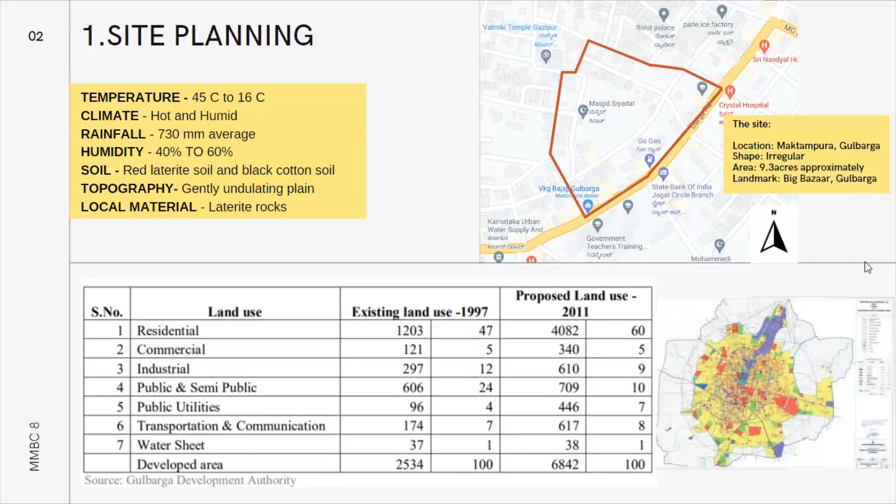The site is situated in Maktampura, Gulbarga, which is 9.3 acres, and the main landmark is Big Bazaar, Gulbarga.

The volumetric hex consists of a large enclosed shopping area from which traffic is excluded, a set of rooms or buildings used as a place for commercial, professional and bureaucratic work, and fully furnished apartments available for short-term or long-term stay.

The vehicular traffic is limited to the periphery in order to have safe pedestrian movement within the campus, and semi-public and public buildings are situated near the road, while the private zone is at the backside of the site.

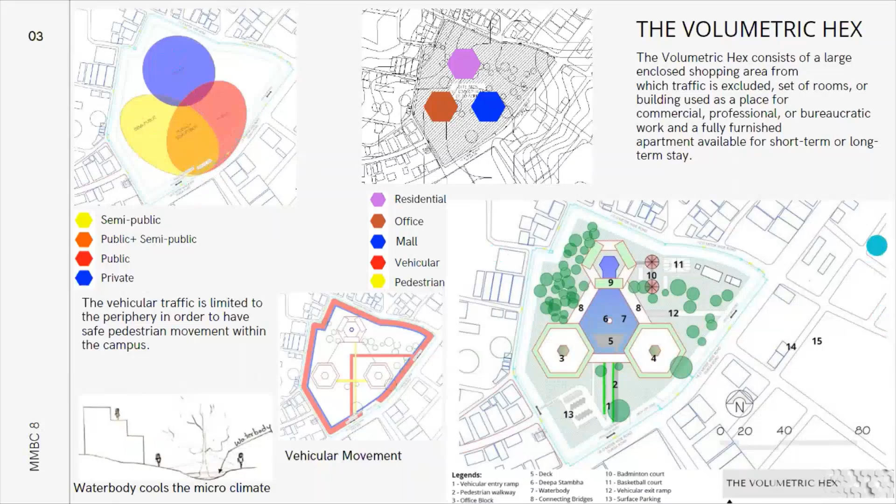Volumes are grouped according to the relationship between each program. The setbacks push the volumes inwards or outwards to create space for windows and courtyards, increasing the visual access from outside to inside.

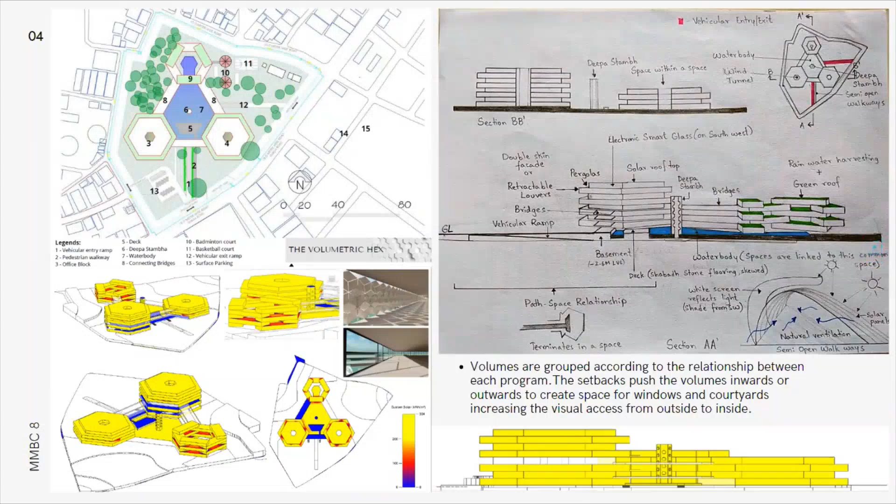Site preservation: dangers like development, people involved are visitors, and techniques like reconstruction, recreation or renovation.

The study revealed that Gulbarga is comprising lack of adequate sanitary and drainage facilities. Therefore, attention of concerned authorities must be made to take appropriate steps in providing for the people of this area.

An artificial recharge of groundwater may be adopted to reduce higher concentration of chemical parameters where it is necessary.

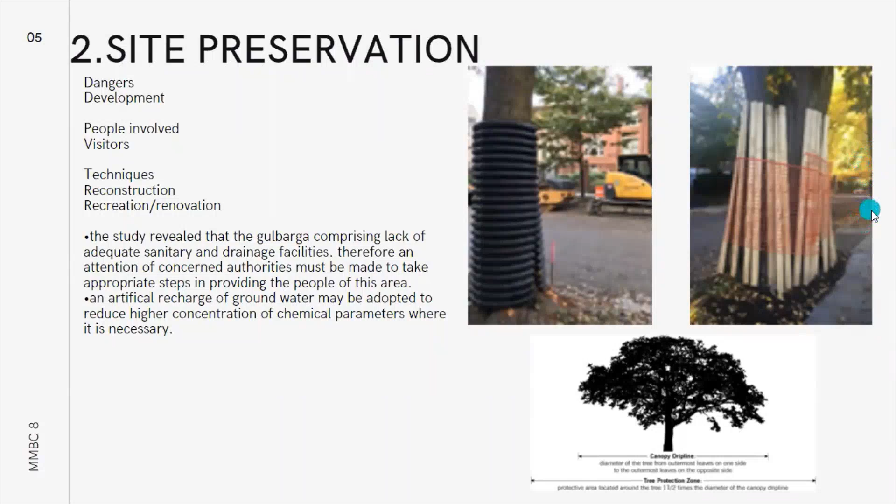Trees in the vicinity of a construction site can sustain damage from soil compaction, severing of roots, trunk and limb injury, and limb breakage from construction equipment and activities.

Preemptive protective measures include collecting and propagating cuttings of historically significant trees before construction begins.

Sensitive construction techniques: plan to use sensitive construction and site work techniques in the vicinity of protected trees, according to avoiding soil compaction during the construction process.

Protecting tree roots from physical damage during the entire construction project, and protecting tree trunks and limbs from physical damage from construction equipment.

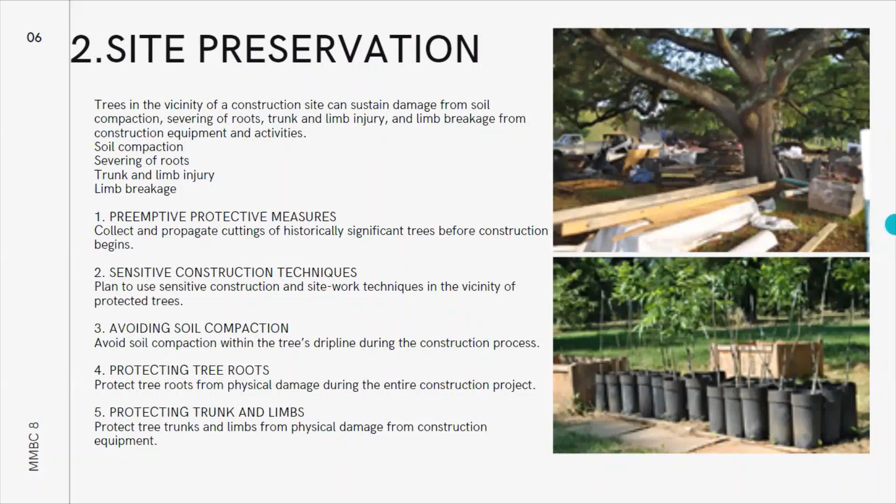Landscape features and vegetation: the type of vegetation is mainly grass, thorny xerophytic shrubs, and trees like acacia, etc. Indigenous varieties are the resultant of all natural forces, adaptation, and survival.

Vegetation such as jowar, groundnut, paddy, and pulses. Also Kamalapur red banana, a special variety of red banana which is exclusively grown in Gulbarga.

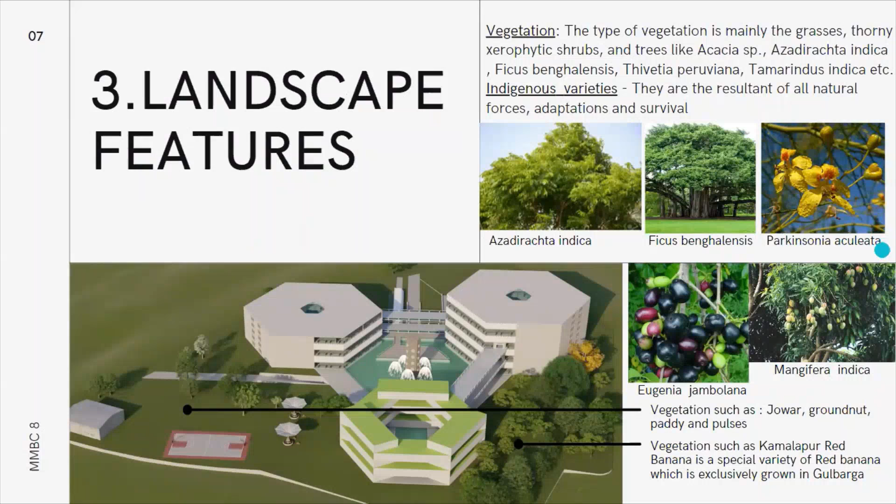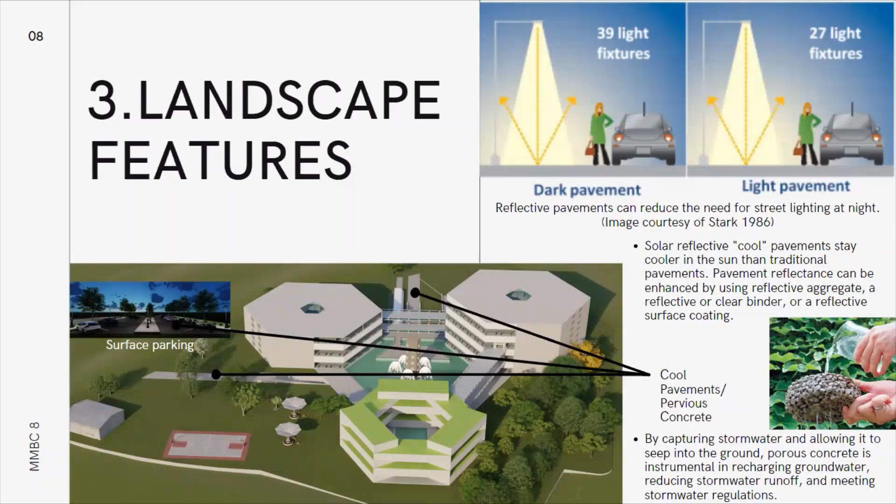Solar reflective cool pavements stay cooler in the sun than traditional pavements. Pavement reflectance can be enhanced by using a reflective aggregate, a reflective or clear binder, or a reflective surface coating. Reflective pavements can reduce the need for street lighting at night.

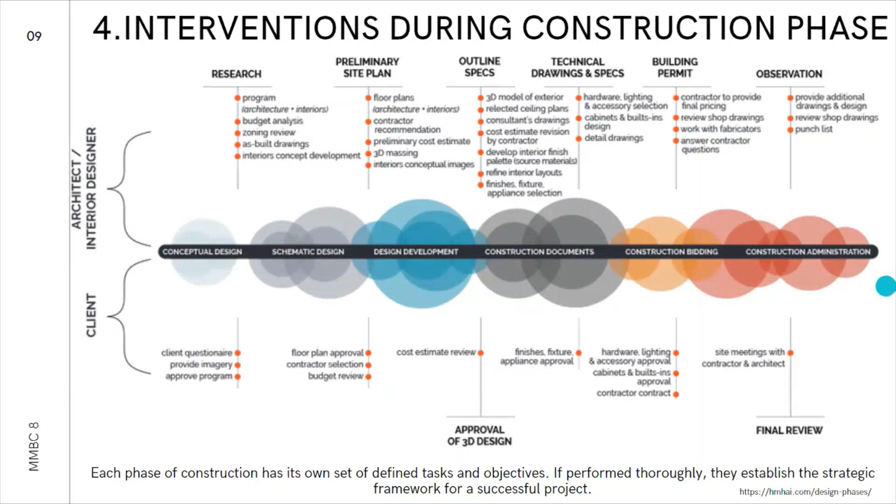Planning and building design, including energy systems like natural lighting, using solar panels, which are designed to absorb the sun's rays as a source of energy for generating electricity or heating.

Solar cells and light pipes are physical structures made for transmitting or distributing natural or artificial light for the purpose of illumination. Smart glass can provide information about a target in sight, and is an automatically operated system.

Double glazing unit is a window with insulating glass with 2 or 3 glass panes separated by a space which is filled with air. Light shelves are a passive architectural device used to reflect natural daylight into the building.

For ventilation, semi-open spaces are given with floor diffusers, which are a grill equipped with a damper that supplies conditioned air.

A wind tower or wind catcher is a traditional architectural element used to create natural ventilation and passive cooling. Personalized air conditioning avoids unwanted or extra wastage of air conditioning and electricity.

Rooftop planting, water treatment of wastewater and reusing of water, and rainwater utilization.

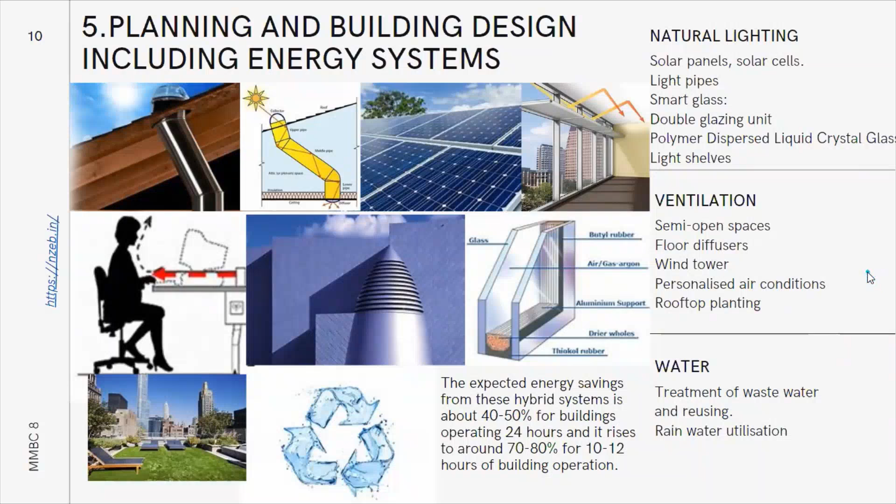The expected energy savings from these hybrid systems is about 40 to 50% for buildings operating 24 hours, and it rises to around 70 to 80% for 10 to 12 hours of building operation.

Provisions for renewable energy systems: for roofs, green roofs and solar panels; for ventilation, heat recovery ventilation and Energy Star appliances; for windows, low-E glass and double glazed; for insulation, insulating walls and ducts, tiles and others like concrete tiles and fiber cement.

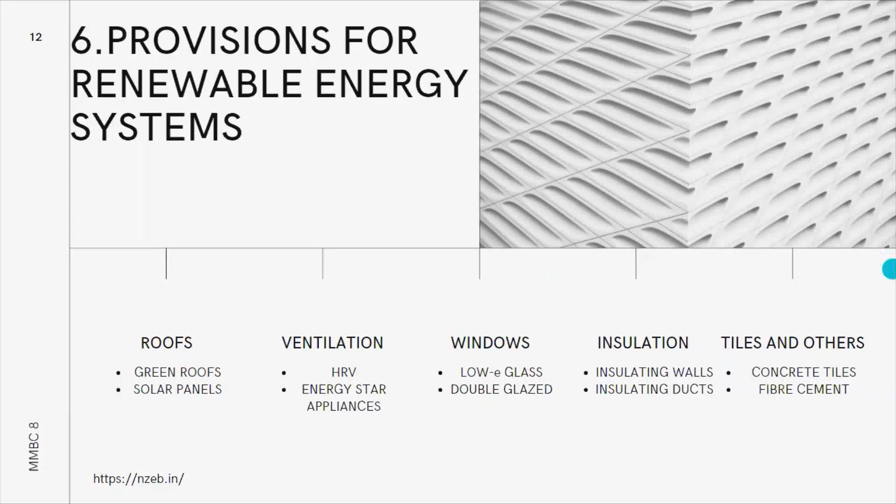These are the locations of each element. For the interior: low-E glasses, Energy Star appliances, solar cells for the pathway covering, green roof and solar panels, concrete tiles and fiber cement for the flooring, and insulated walls.

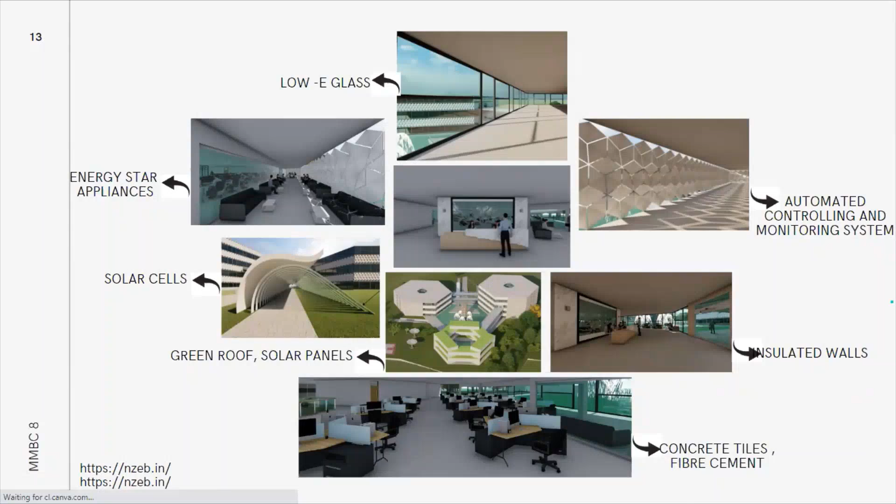Material selection, structure, and interior. Facades are the screen wall of cities.

The first goal here is to improve thermal mass while reducing weight and depth, with lightweighted, prefabricated, opaque facades that are easy to install and reuse, and that behave thermally like heavy massive walls.

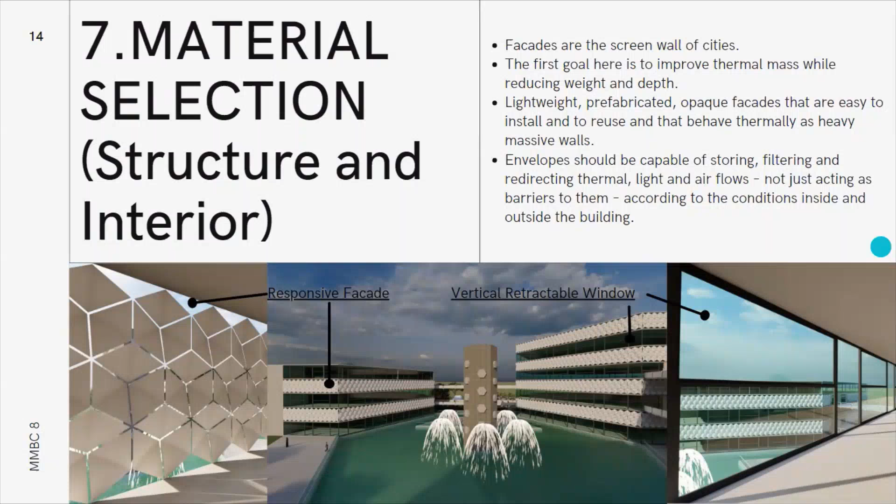The fixation of the substructure movement joints responds independently from the substructure. The triangular unit acts as individual shading devices that unfold to various angles in response to the sun's movement, in order to obstruct direct solar radiation.

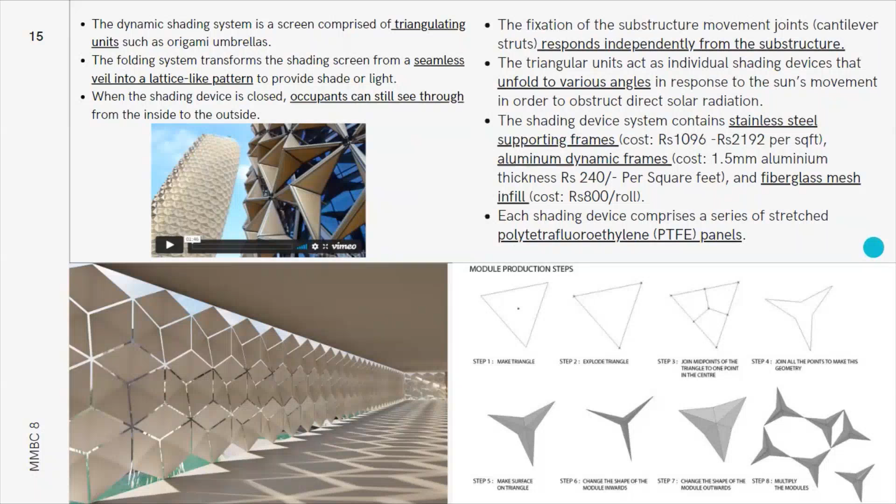The shading device system contains stainless steel supporting frames, aluminum dynamic frames, and fiberglass mesh infill. The stainless steel frames and aluminum dynamic frames, which go up to 1.5 mm aluminum thickness, cost rupees 240 per square foot.

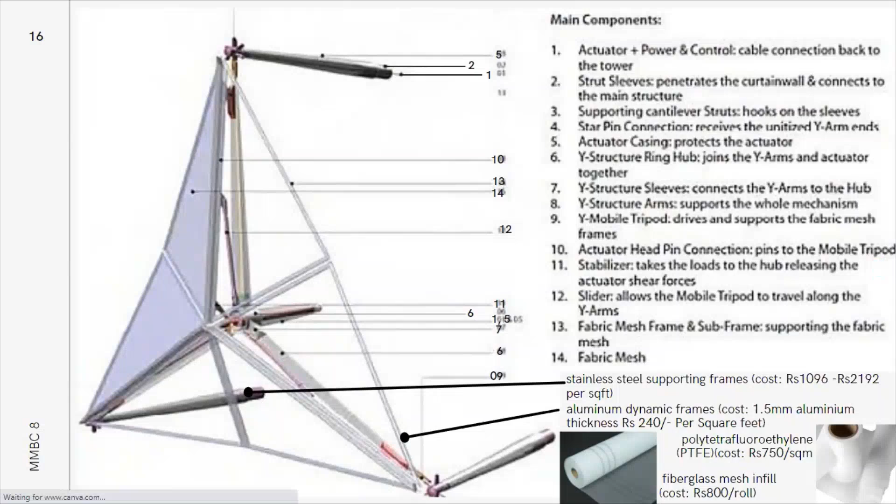Polymer dispersed liquid crystal costs up to rupees 5,300 per square foot. This can be used for interior and exterior glass applications, and switches from clear to opaque in less than a second.

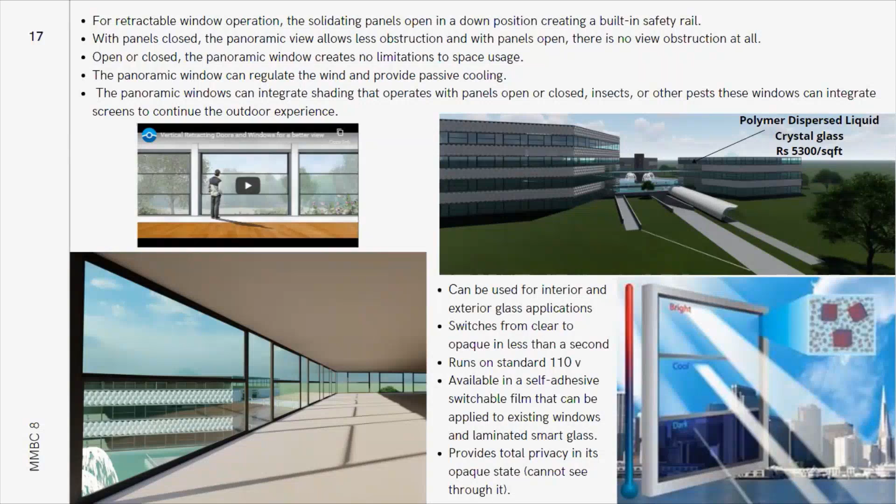By combining the unique properties of titanium dioxide and nickel oxide semiconductors, the researchers were able to generate an efficient transparent solar cell.

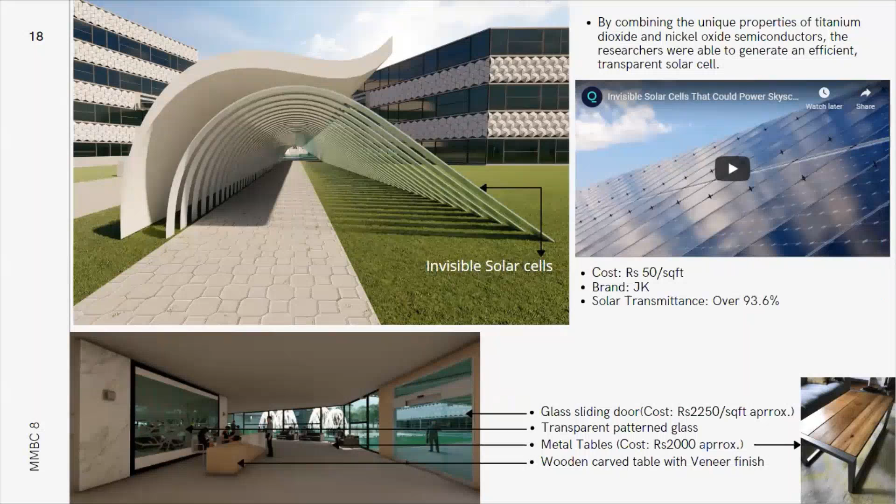Spoke wheel system: a self-contained cable-supported membrane roof with a retractable inner roof. The two layers of foldable PVC-coated polyester membranes consist of an air cushion and are stabilized by an outer compression ring.

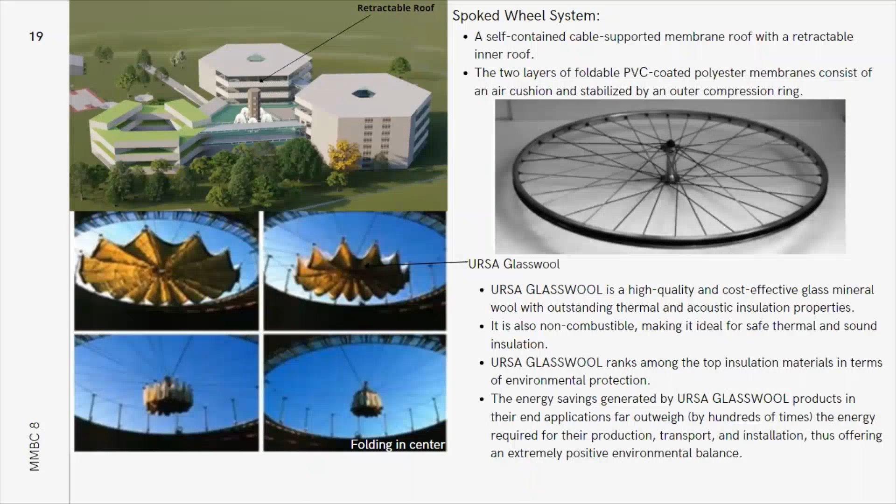The material used here is URSA glass wool. It is a high quality and cost effective glass mineral wool, which can withstand thermal and acoustic insulation properties, and provides safe thermal and sound insulation.

Structural systems: invisible solar cells are used for windows. By combining the unique properties of titanium dioxide and nickel oxide semiconductors, the researchers were able to generate an efficient transparent solar cell. Inflated steel is used for the pathway, and the exoskeleton structural system is used for the whole built form.

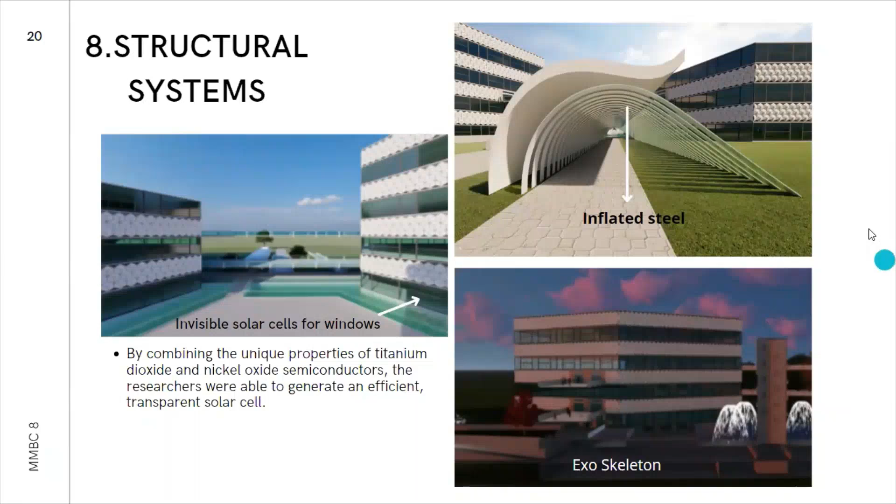Planning for efficient water and waste management. The first diagram is the schematic representation of water balance during summer season. The project demand is about 1360 kiloliters per day.

The STP water used is 20 kiloliters per day for the swimming pool, 1018 kiloliters per day for washing, bathing and kitchen use, 324 kiloliters for flushing, 353 for HVAC, and 466 for landscaping.

The second diagram is the chart for low flow fittings with aerators, which provide water conservation. Aerators are small parts placed on the end of faucets, which help dilute the water stream, significantly reducing the volume of water flowing from faucets.

The third diagram is the waste flow diagram, showing a centralized processing unit on site and off site, which handles toxic and electronic waste along with glass, metals and papers added for recycling and reusing. For off-site disposal, this includes plastics and mixed waste.

Domestic waste like food waste, along with open area wastes like agro wastes, are used for biomethanation, which is then used for cooking purposes for the canteen. Segregating waste is an important part of the waste flow diagram.

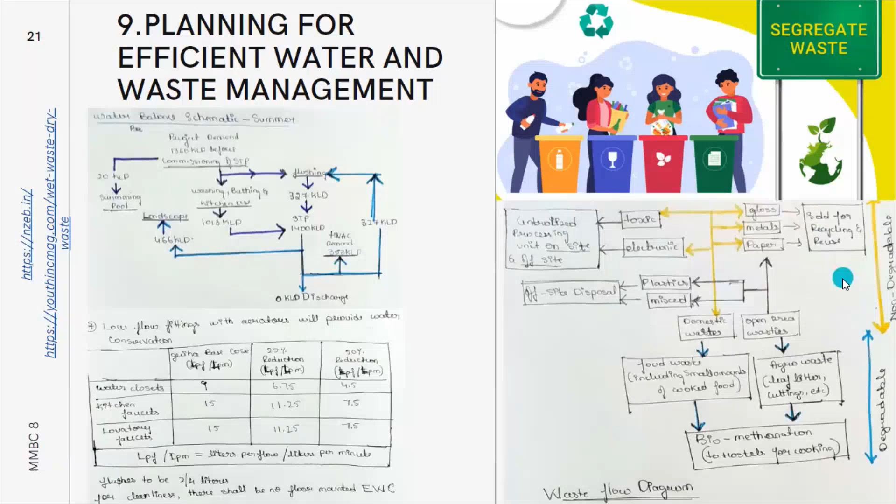For waste management and water treatment, facilities are placed at the corner and end part of the site, at the lower level, for easy collection and disposal of waste.

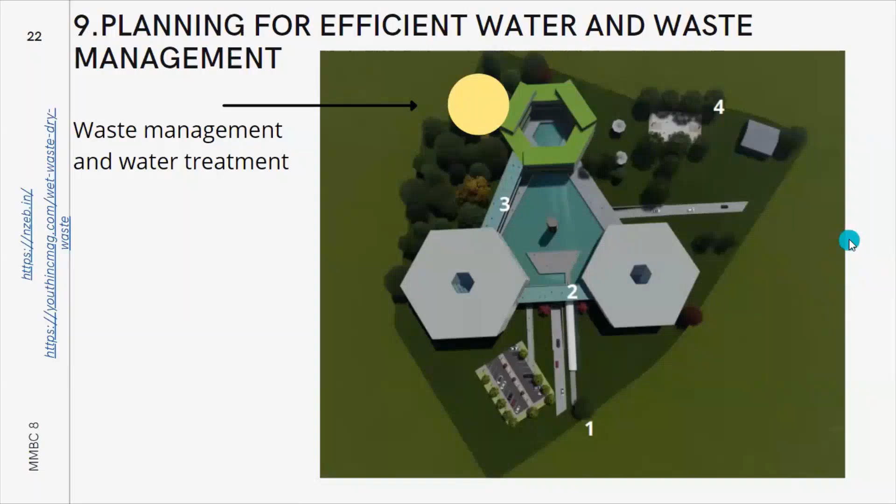Operation and maintenance: for retractable window operation, the solidating panels open in a down position, creating a built-in safety rail. With panels closed, the panoramic view allows less obstruction, and with panels open, there is no view obstruction at all.

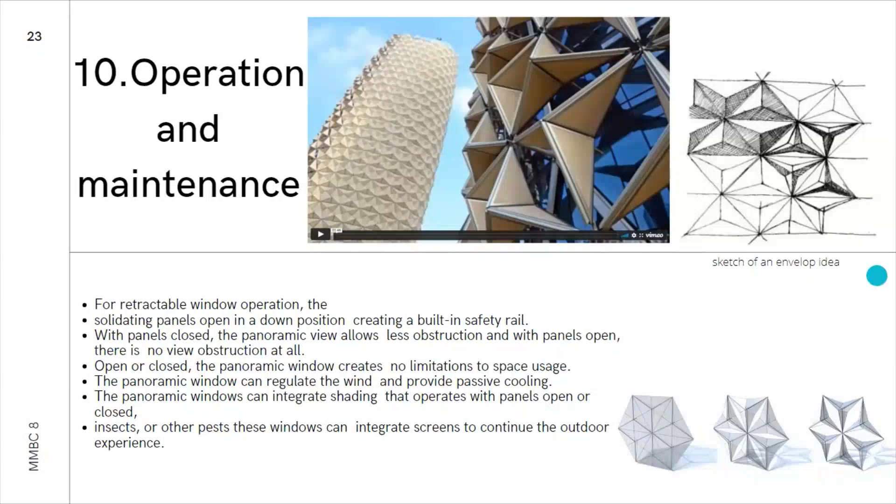The membranes consist of an air cushion stabilized by an outer compressing ring. A retractable roof is a roof system designed to roll back the roof on tracks so that the interior of the facility is open to the outdoors. Open roofs are typically seen at smaller athletic venues such as country clubs and universities, and also in construction of commercial greenhouses and garden centers for climatic control purposes.

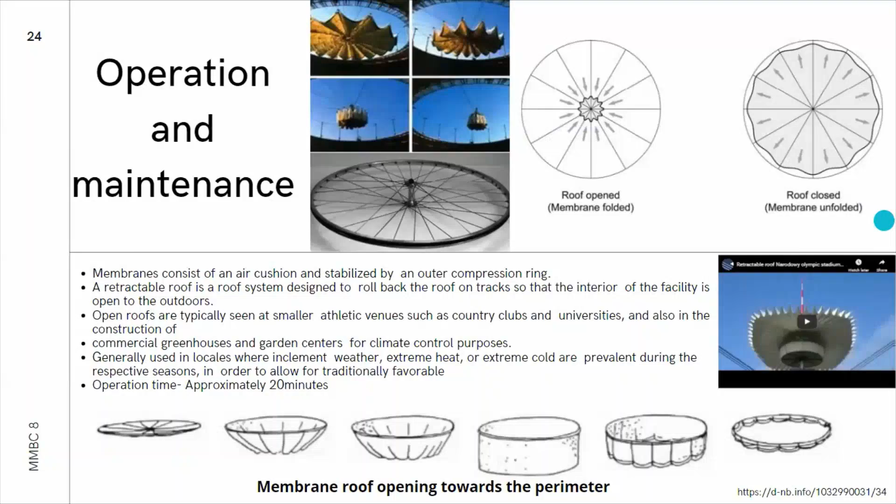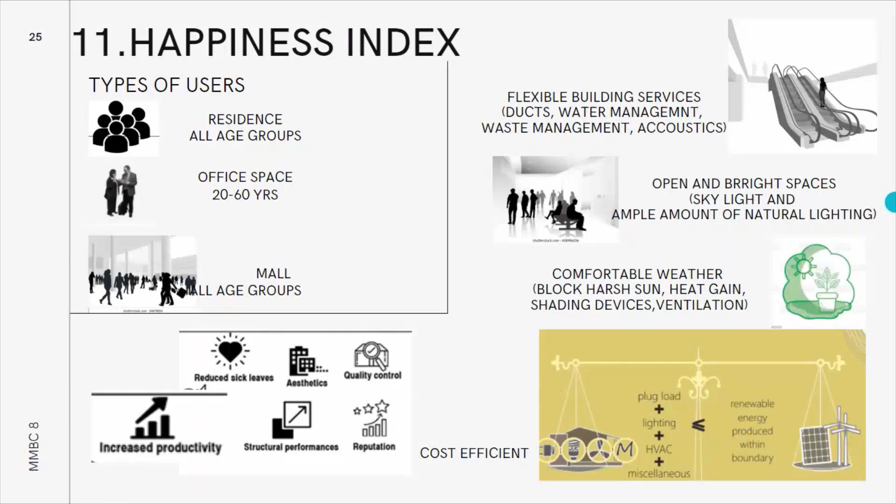Smaller shaded windows increase cross ventilation, along with the provision of a retractable roofing system and trees to block wind during winter season and provide shade in summer season. North facing verandas can be converted into pergolas with adjustable blades, along with the addition of shading structures such as verandas and other balconies.

To keep the inside of the building cool, double facade techniques can be used, along with the provision of a retractable roof for the water body to conserve water. Thank you.